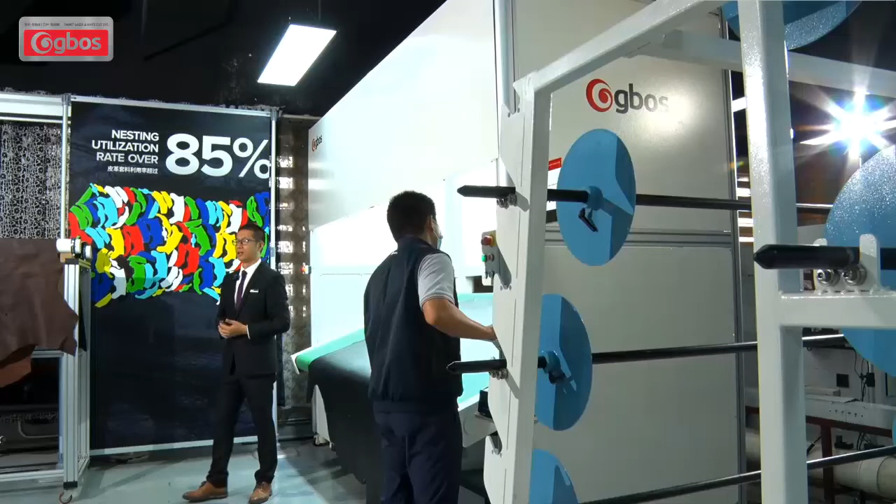Today, our topic is about digital cutting for leather. Less consumption is very important. As we know, leather material is very expensive and not easy to get, so we always need higher utilization. The more leather you save, the more money you get. And the greatest thing is you are making a contribution to society.

Now I'm introducing you to the new system: ITS3, the third generation of our nesting system. The utilization could be up to 85%.

Firstly, let me introduce the hardware to you. The working table has a slope of about 20 degrees, so it follows ergonomics. Your worker could work like this, and it will be easy to reach the far end.

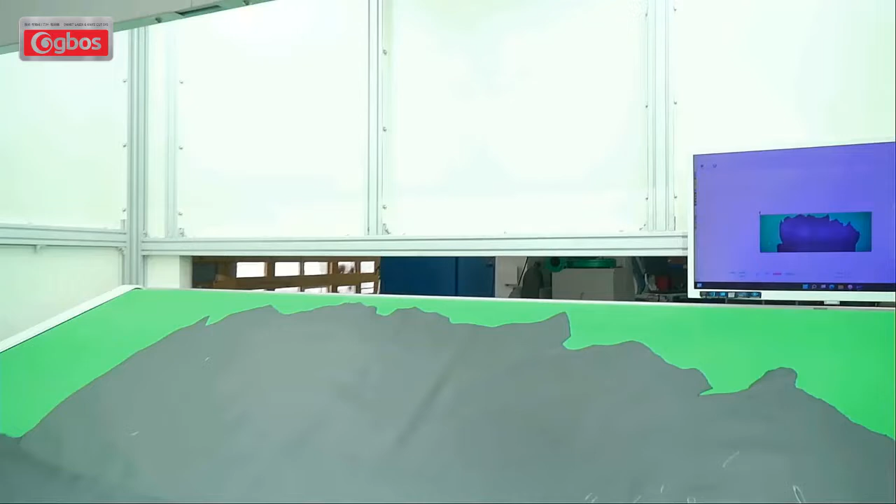Here, equipped with a projector for preview, and also two cameras at the top. The cameras are used to take photos of the leather. What we are showing, the leather size is about 2.6 meters by 3 meters.

Now we show the software part. It's splicing, and the camera will take a photo of each part of the leather and then generate a complete image.

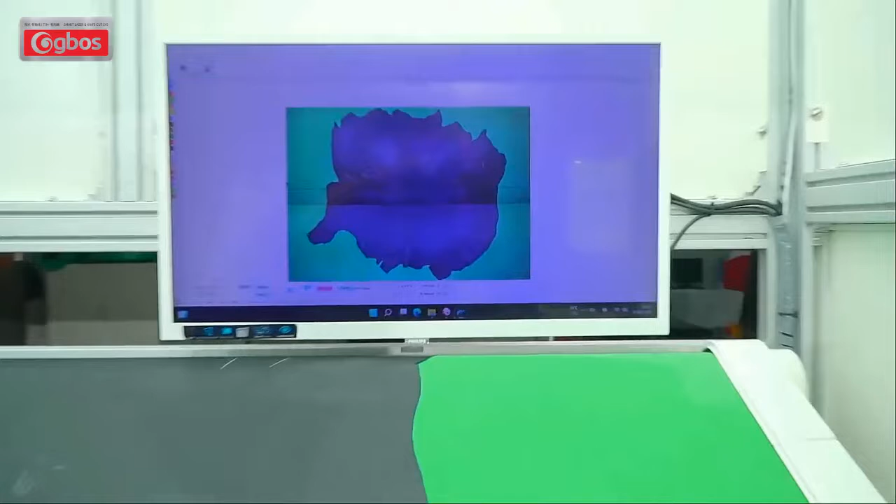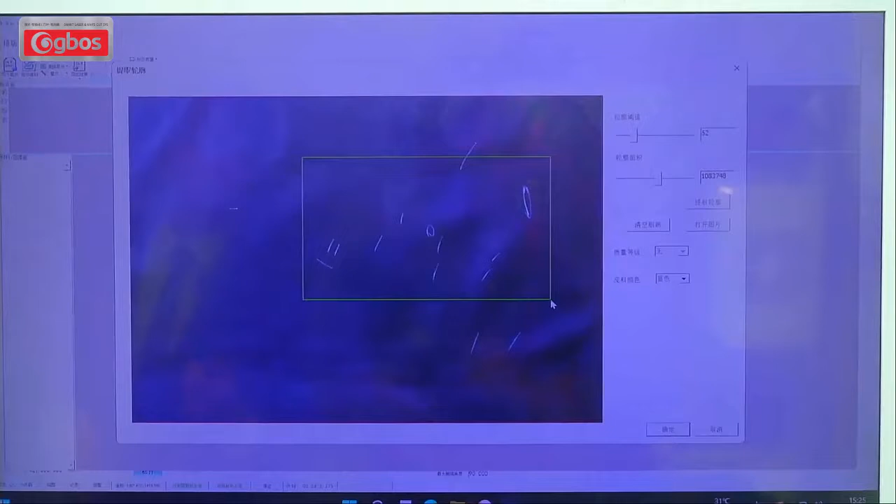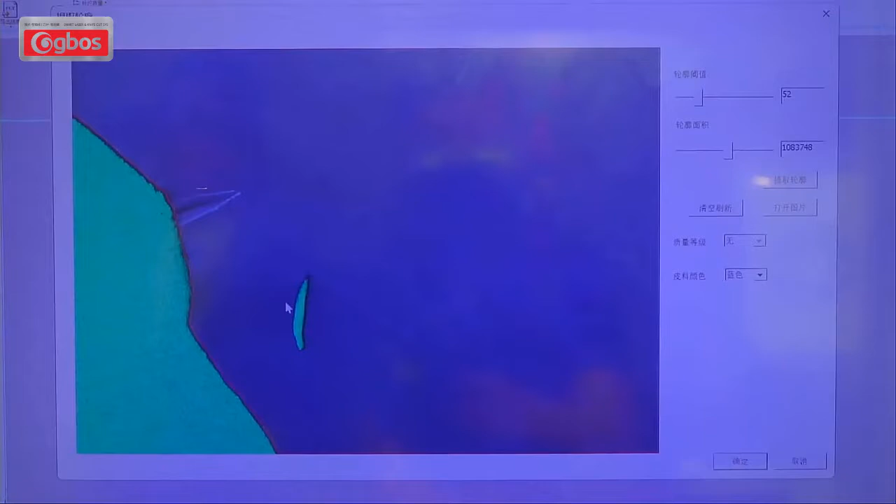Now we can import the components, and here we already marked some defects. Then we just mark it on the system. It's very easy and quick. All things are done automatically.

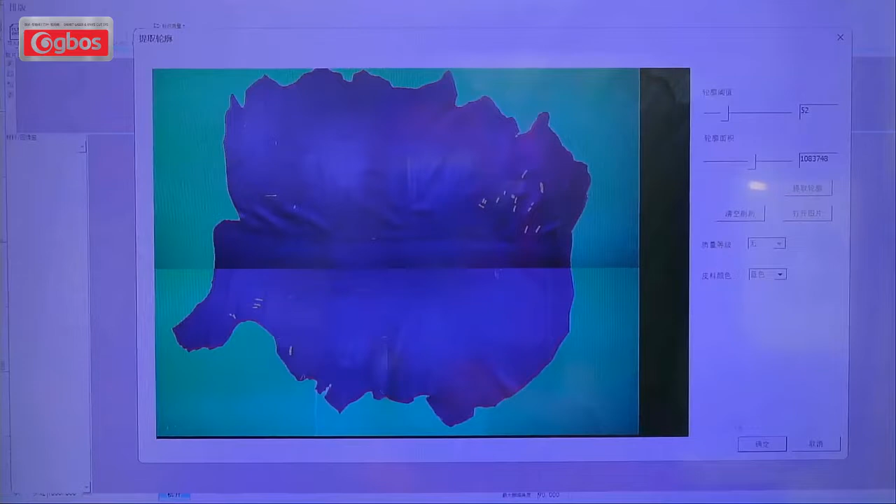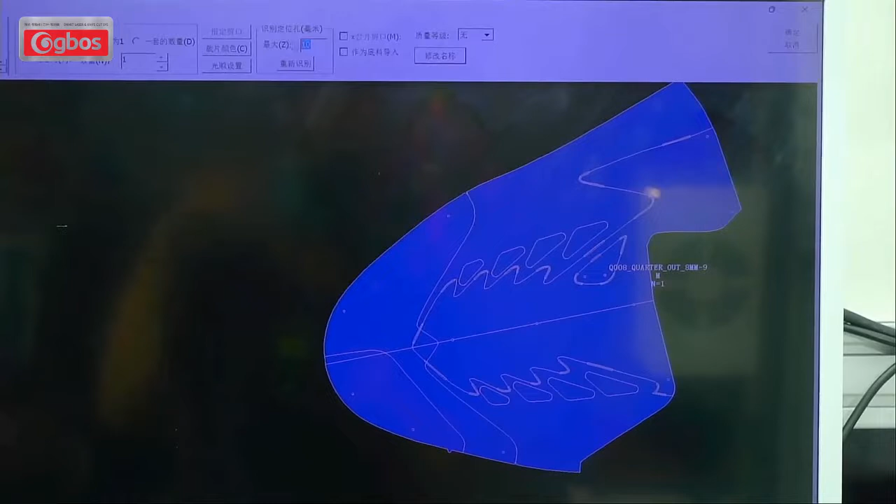Now we import the components file. This file includes more than 20 kinds of different sizes and shapes of components, and we will make a challenge today for their utilization. Those components have different colors, generated automatically by this system.

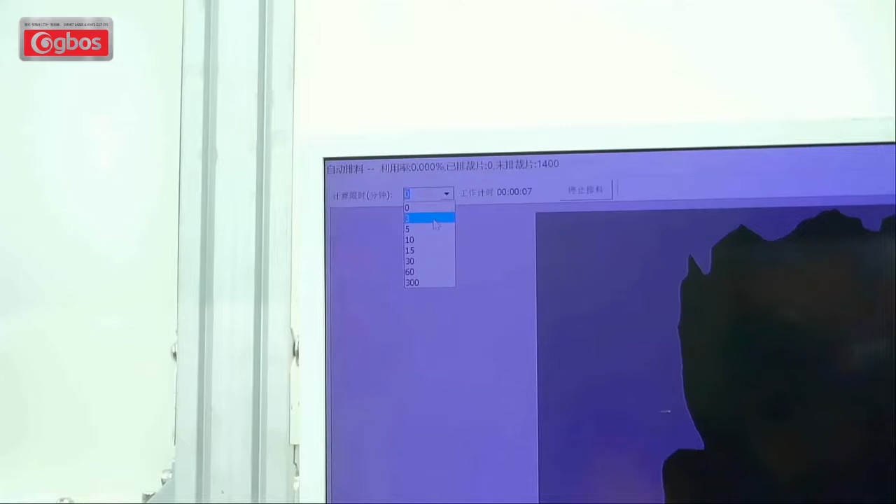Now we choose the time for nesting. Normally 3 minutes to 10 minutes is better.

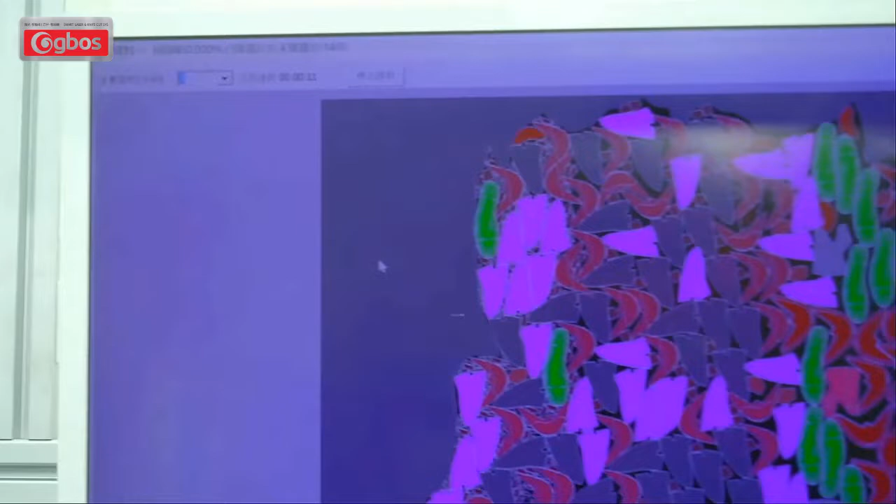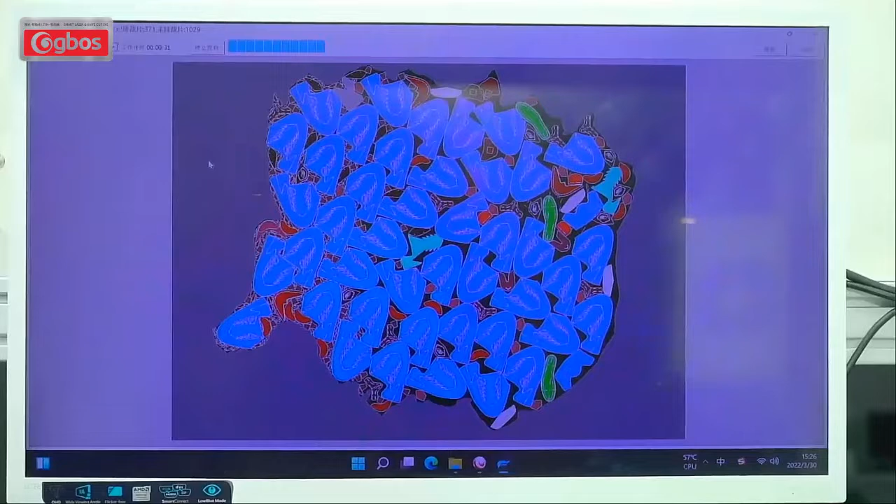What we are showing is mixed nesting, and we can see the different colors of the components. You can also choose a different color for each component by yourself.

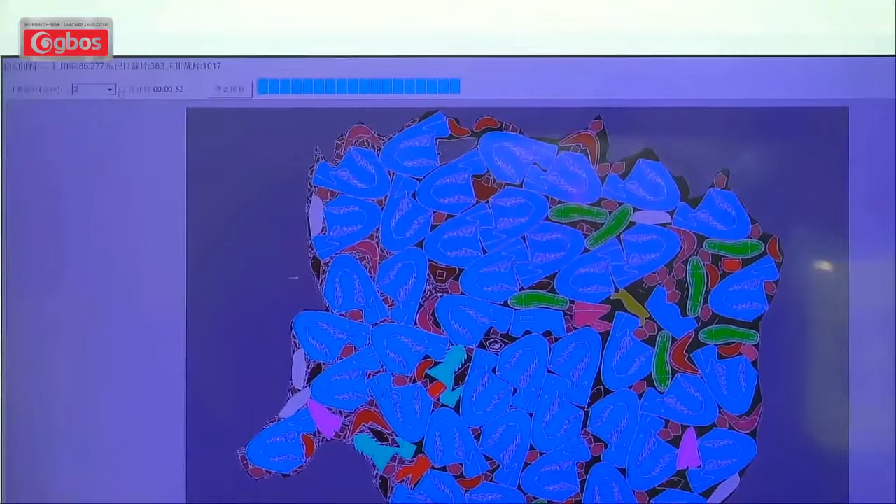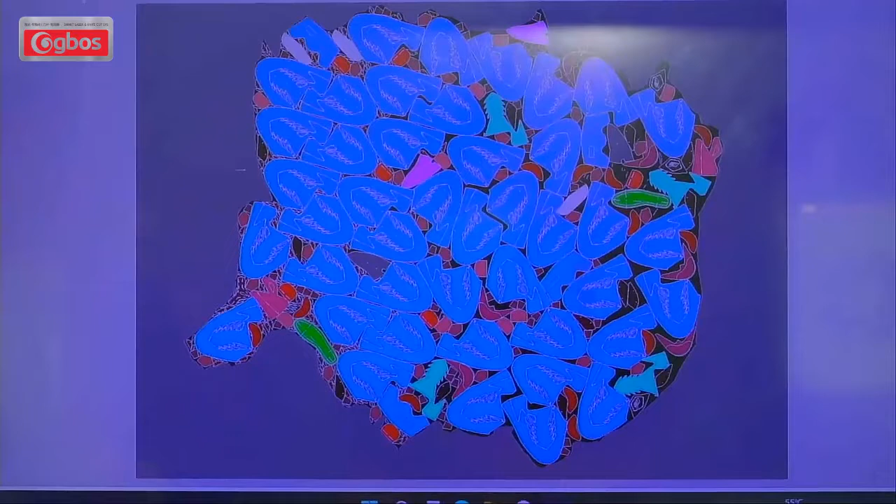In the traditional way for laser cutting, people will recognize each component and the level of the laser, and put the components to each level. That takes a lot of time, and the efficiency is very slow. That means your cost will be high.

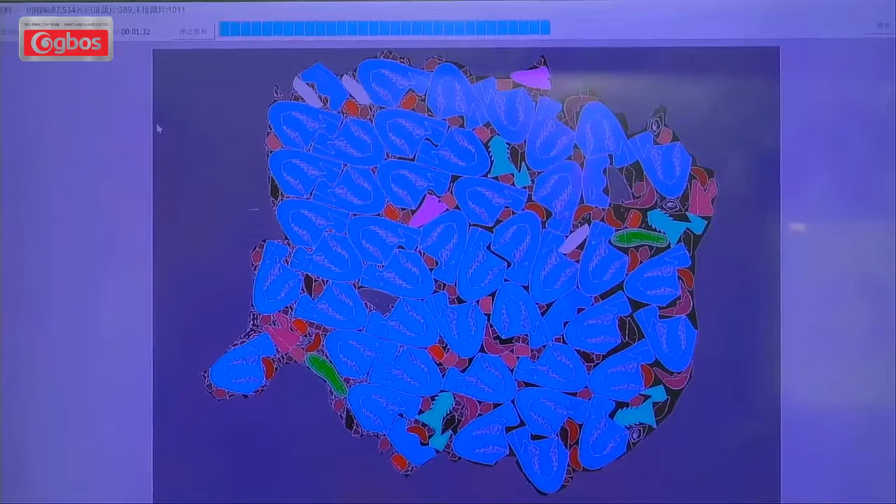So why not use intelligent technology to help you save this part of the cost? If we make the laser in different levels and specify different colors for the components, it will be very easy to put the components to each level of the laser.

This system can make 16 areas of different levels. As we know, in the market, other nesting systems just make about 6 or 7 areas for zonal nesting, but we can make 16 areas.

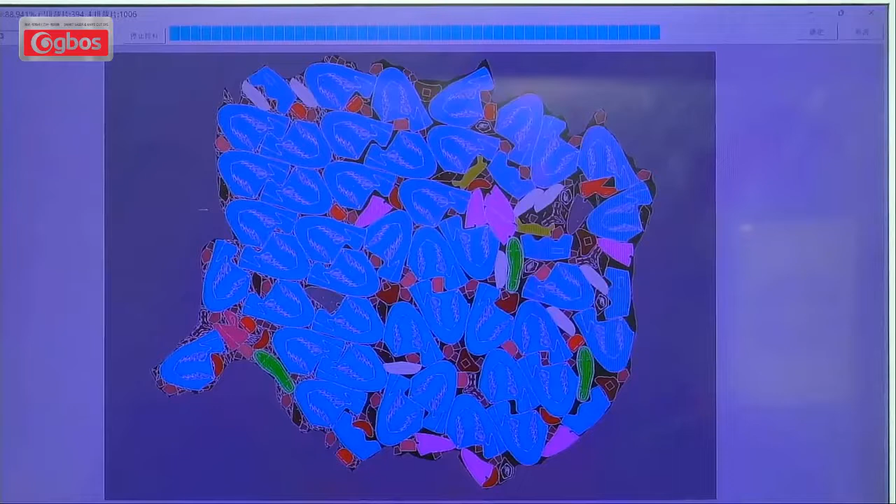So with automatic nesting, and also the next step of automatic cutting, it will save most of the time. That means you save your cost.

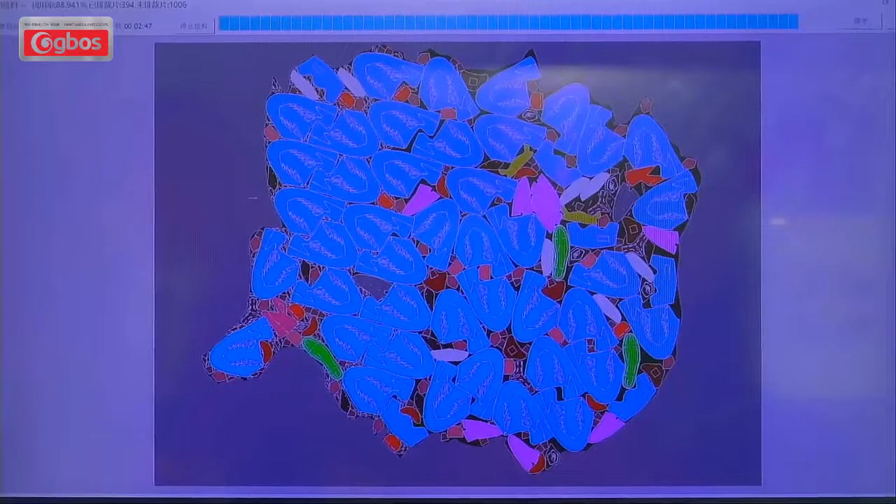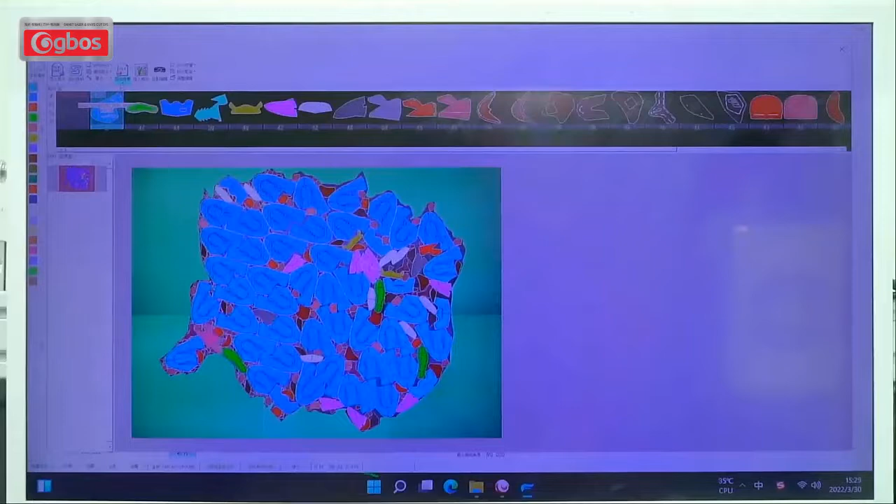We can see the utilization now is close to 90%. This is a very good result for nesting.

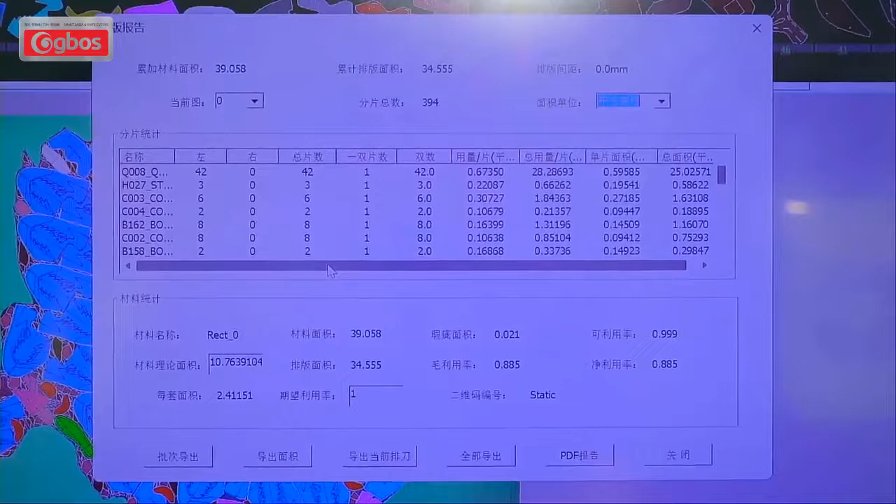And now we can output the report. From this report, you can see each component's area, the material area, and also the utilization. Here it shows 88%. We can also output the report as an Excel file.

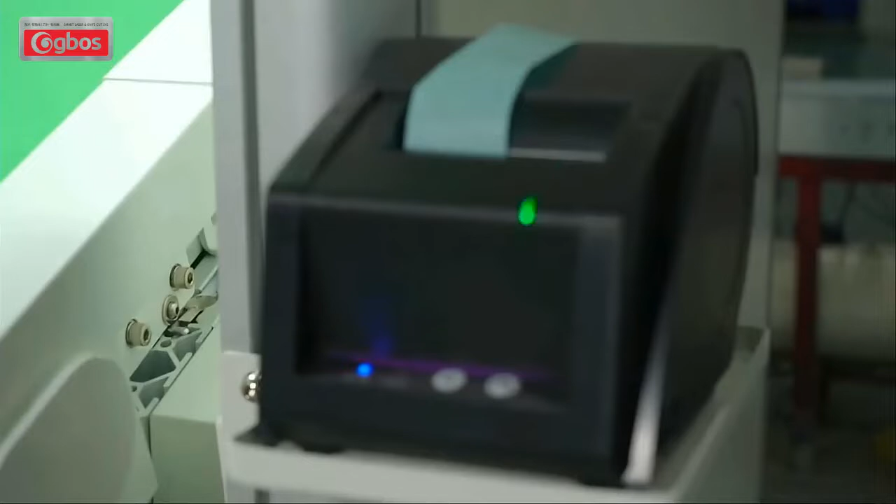After the nesting, we can make the QR code. We just name the QR code - it's like the identification of this leather. Then we can use the machine to print it. It includes all of the information of the nested leather, and we just stick it on the back of the leather. That's done, so now the nesting process is completed.

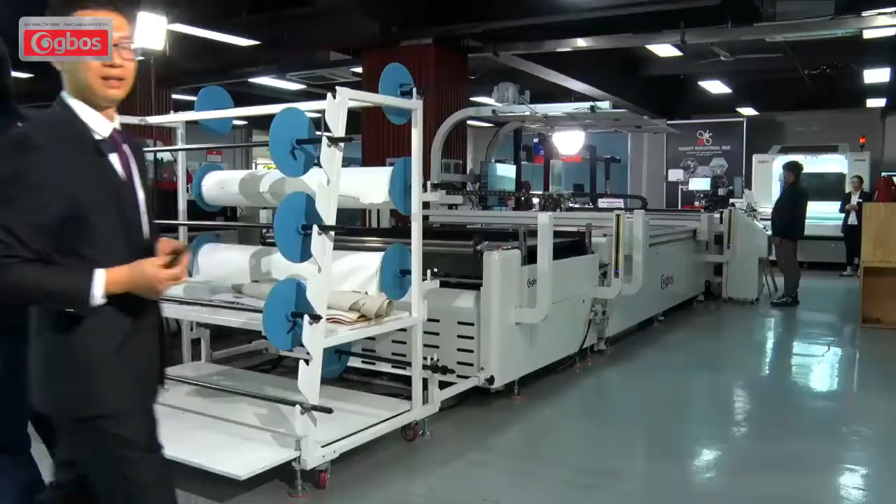This leather is ready to cut. After the nesting, how do we cut it?

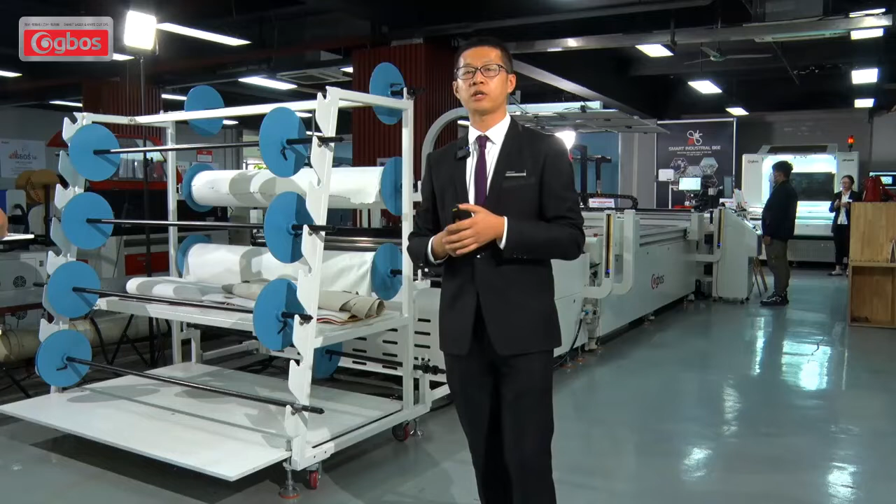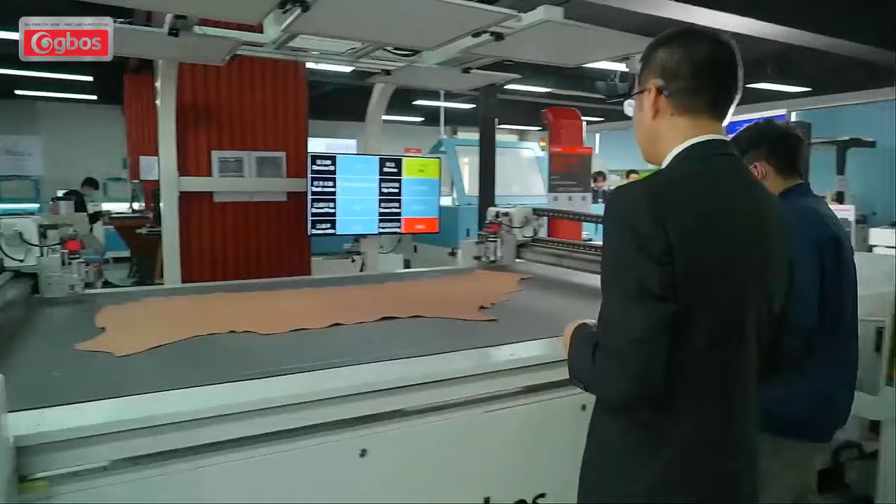Our system is really connected together. We just use the scan gun to scan the QR code, and it will transfer the nesting file to the computer. Let's check - we scan it and it's immediately loaded. We have another nested piece.

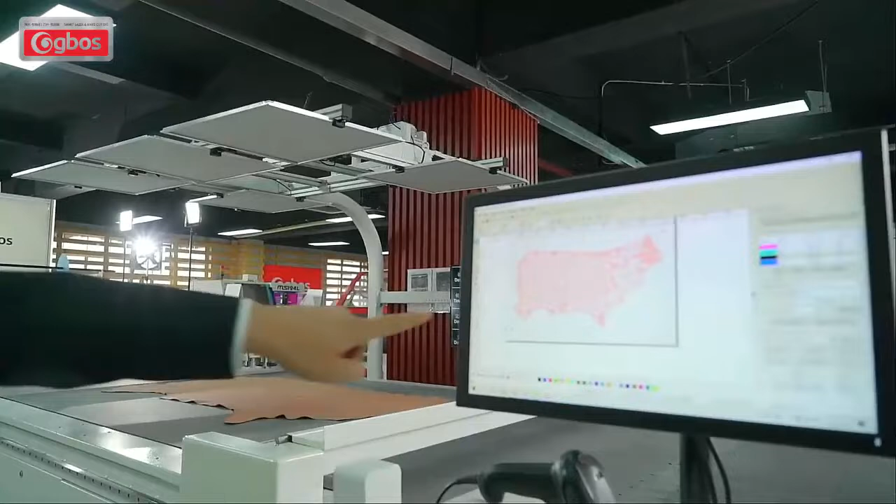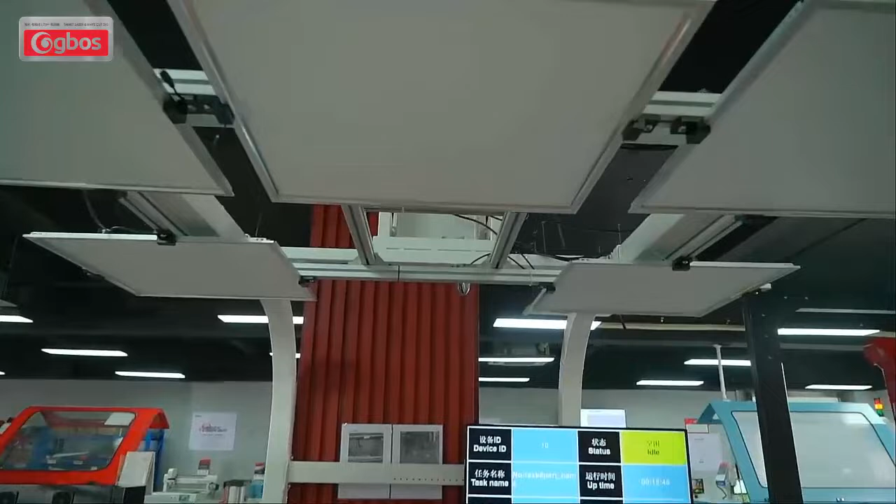We have another nested laser here, and we just scan the QR code. The file will be transferred to the computer, and then we use the CCD camera to make the positioning. It's automatic - the pattern files are put on the leather automatically.

That is automatic - you don't need to put the leather under the pattern. Normally, we would use the projector to make the positioning before, but that takes a lot of time. You need to move the leather often to match the pattern. Now we just use the CCD camera to make automatic positioning. It's very easy.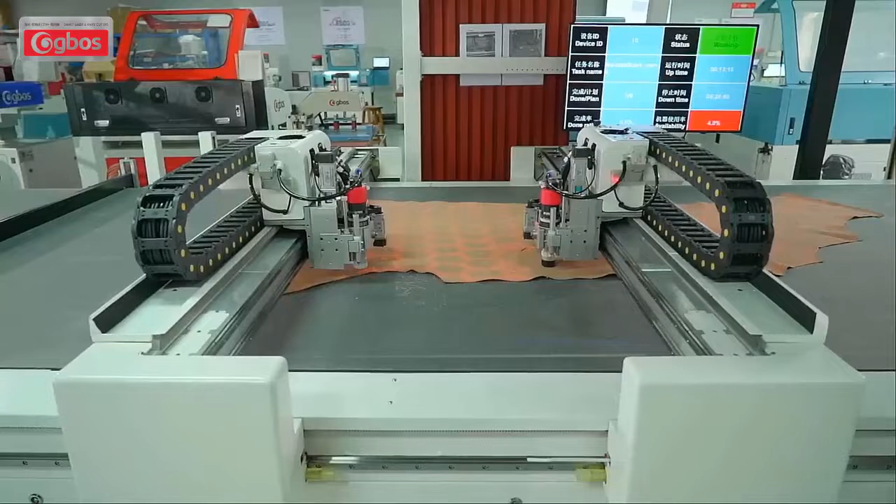We can see the knife head is a mute head. The mute head means the noise is lower than 80 dB. It's open style, so noise is very important in your workshop - it's about environment protection, so your worker will not be disturbed by the noise.

Besides, we have two punchings. You can put different sizes of punching on this head.

The transport system uses a Japanese Panasonic servo motor, and the pneumatic system is SMC. Now we check the rail.

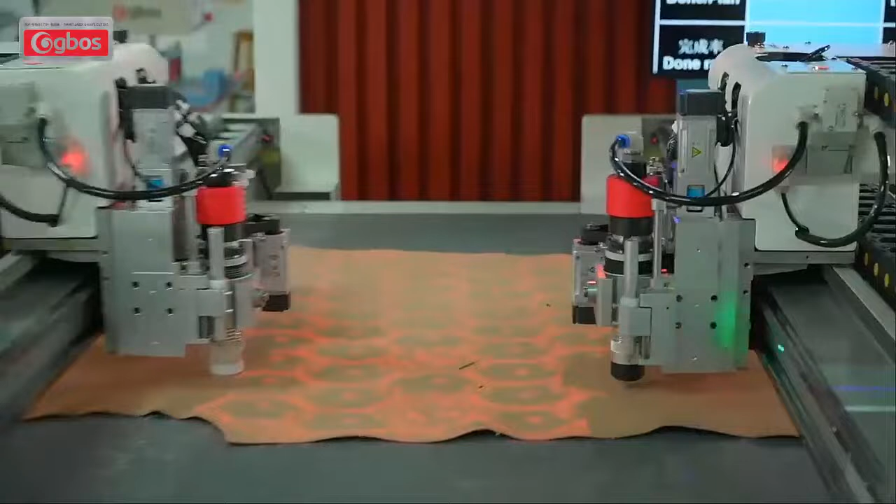This bridge is casting construction. The design lifetime is 20 years - 20 years lifetime, you don't need to make a repeat investment. Don't need.

And here is the gear rack and the linear rail. The precision is 0.01 millimeter.

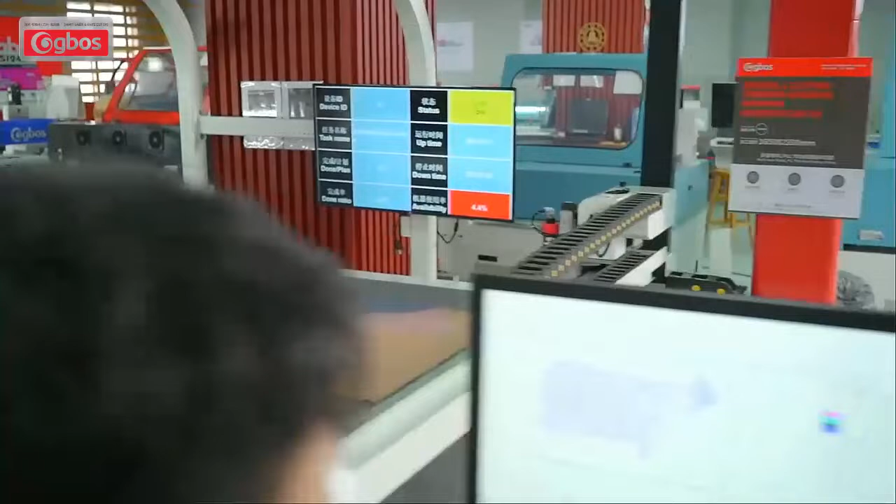Okay, now after cutting, it will feed into the picking area, and then we can make the collection. Thank you so much.

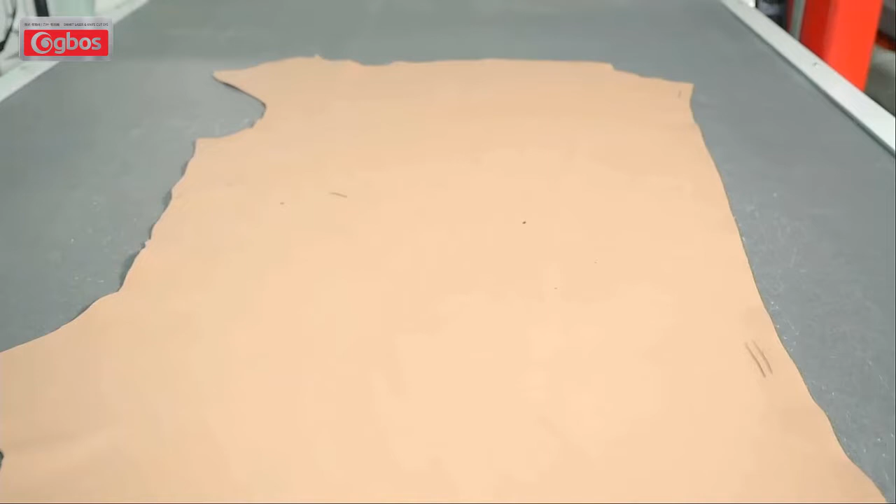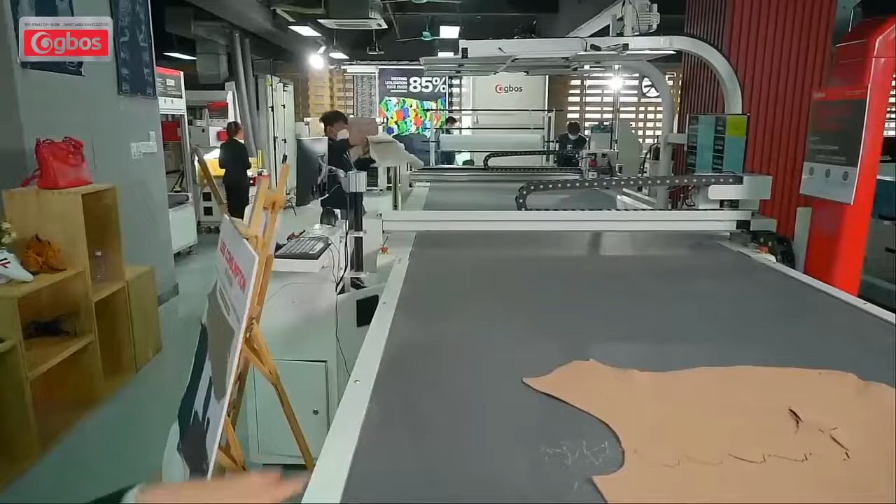Here we have enough space for collecting the components. That's an easy job. And at the same time, when we're collecting the components here, we can load in another leather.

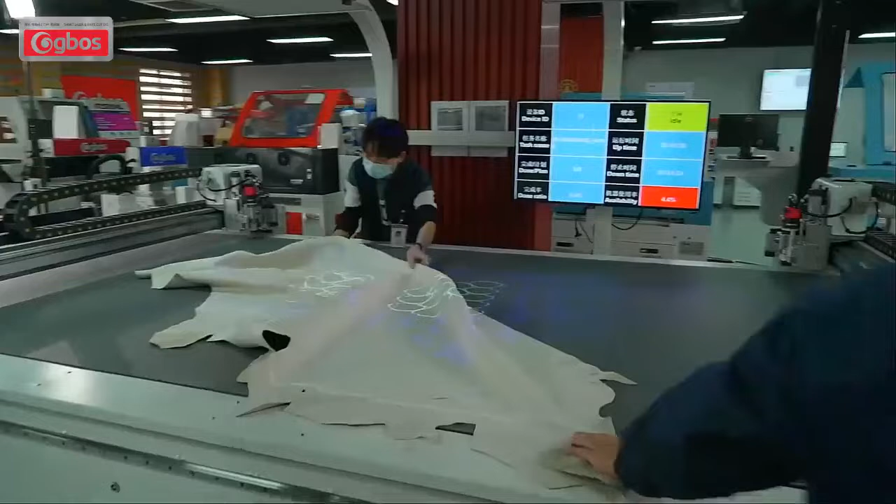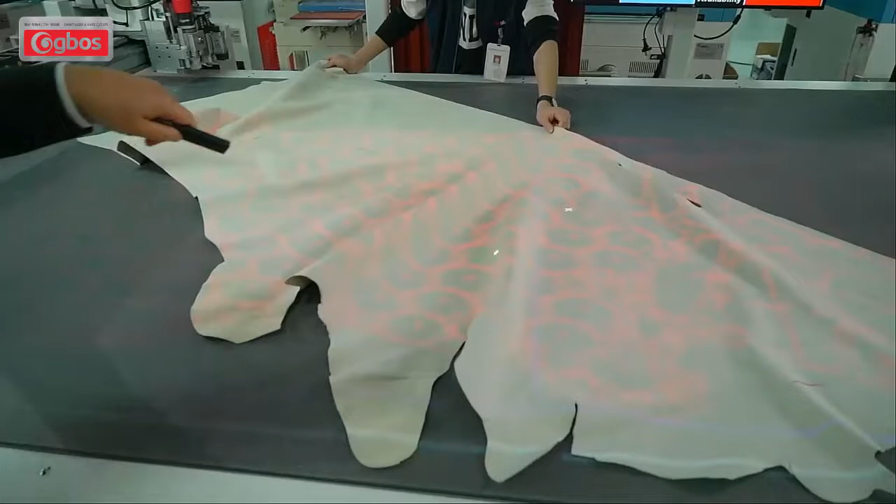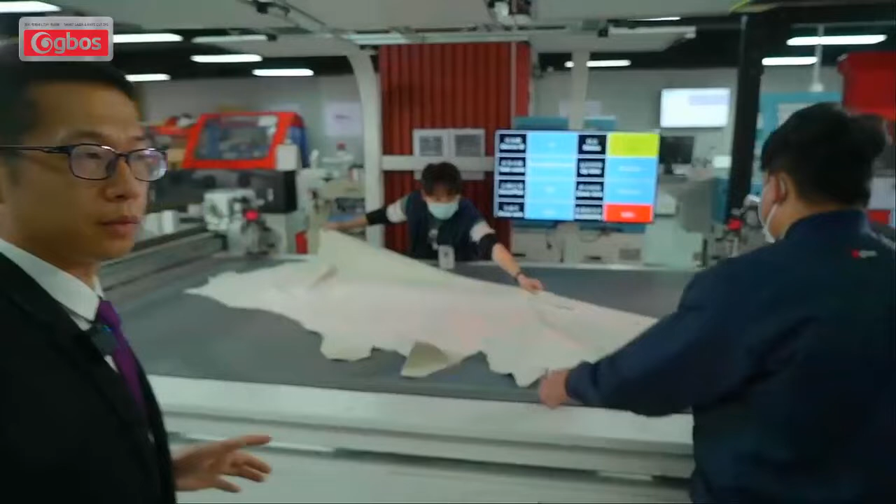Under the projection, here we'll show the size of the components. Now this size is size 8. We just show the workflow, and then also use the CCD camera to make the positioning to do the next cutting.

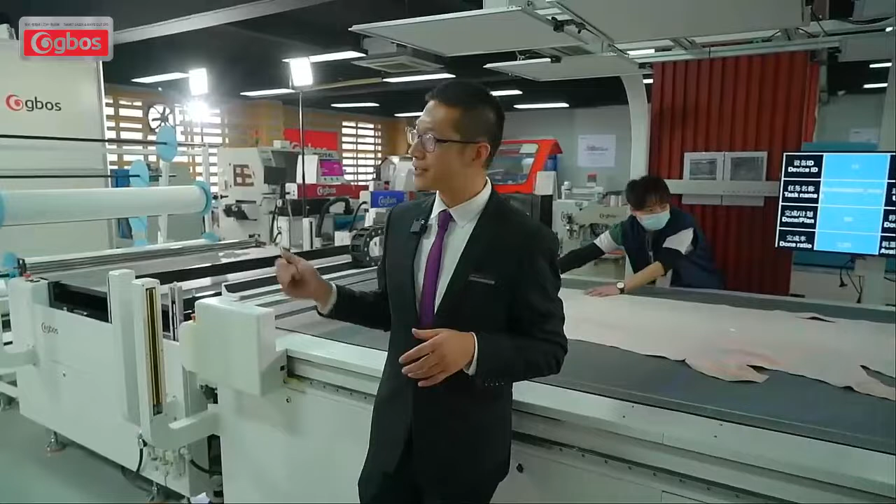This is all about the workflow for the leather nesting and cutting. And about this machine, I want to introduce you. From this view, we can see the overview of this machine. It is just like an aircraft carrier, right?

And the main part is a cutting area, just like a platform. That means you can only have this cutting area for your job. Our conception is 1 plus n. The 1 is the platform. N means different modules, different composition, different combination. You can have the cutting area plus the picking area for your job, and also you can have the feeding area plus cutting area plus picking area for your job.

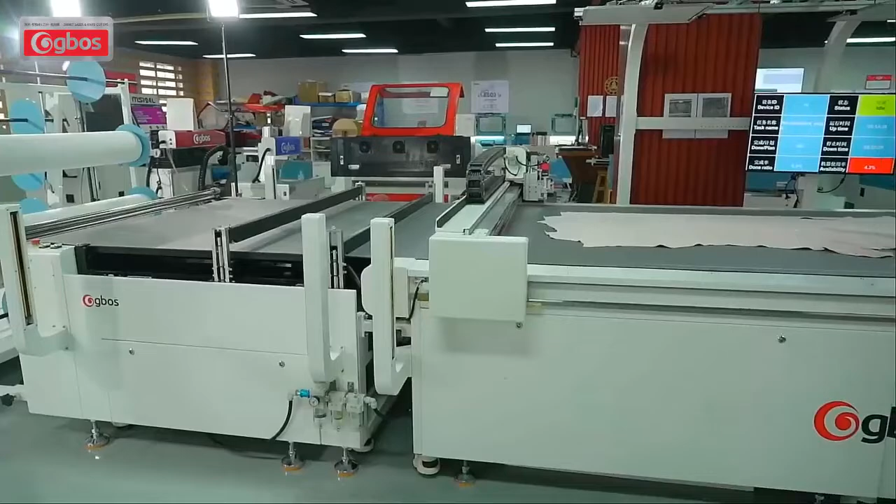Here is a material holder. The material holder can have 6 to 8 raw materials, and with the clamping system here, this 2-bar clamping system, it will feed the materials with the conveyor together without any pulling. As we know, pulling will make the materials deformed, and that will affect the cutting result. So in this way, there will be a very good result of the cutting.

Also, the safety system, the safety sensor, is necessary. We have the safety sensor at the feeding area and at the cutting area, and also an emergency switch. Here is an emergency switch. We have 6 emergency switches in the middle and also in the picking area. Under the table, it is completely enclosed to block the noise from inside.

And under the cutting area, there is a very strong vacuum exhausting system. It has 12 areas, so it can enhance the exhausting power in each smaller area. If we cut this area, the power is just focused on this small area.

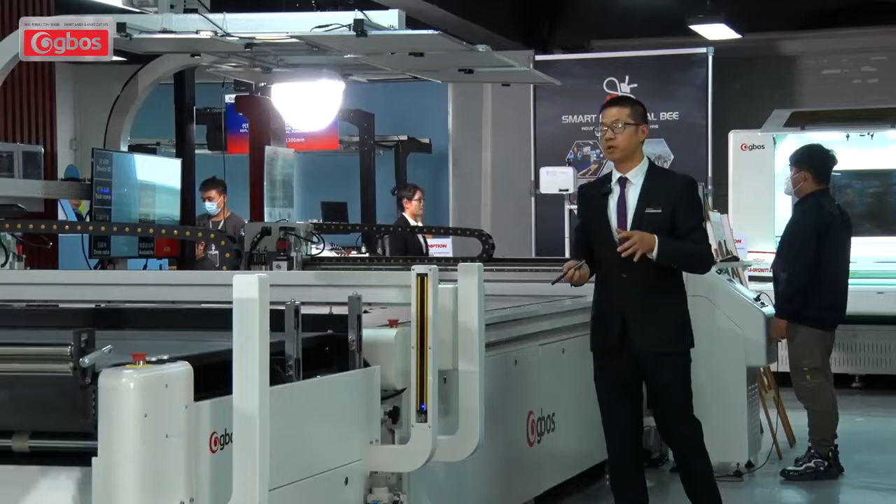This is about the hardware, the options, flexible combination of this machine. And about the software part, it's also 1 plus n, according to different applications you have.

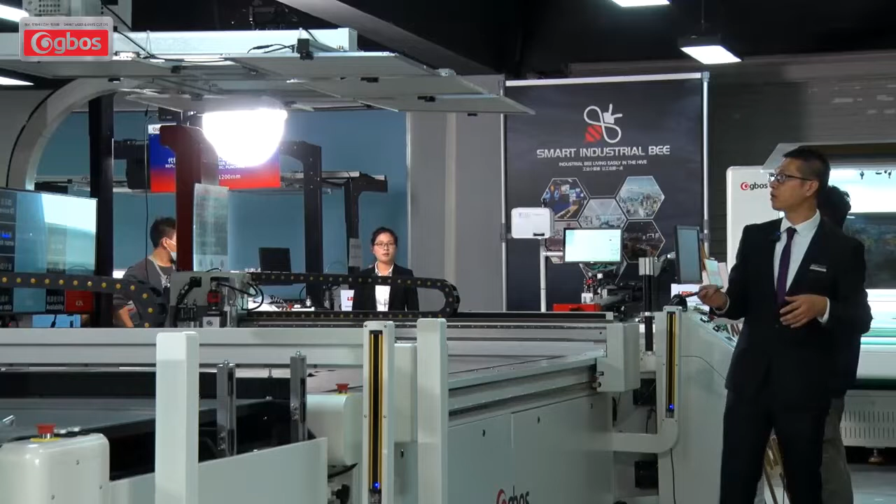We can check the upside. Here are the projectors. This is a general function, just for previewing, like this. And also the LED panel, it works with the camera. Here is a camera on the top.

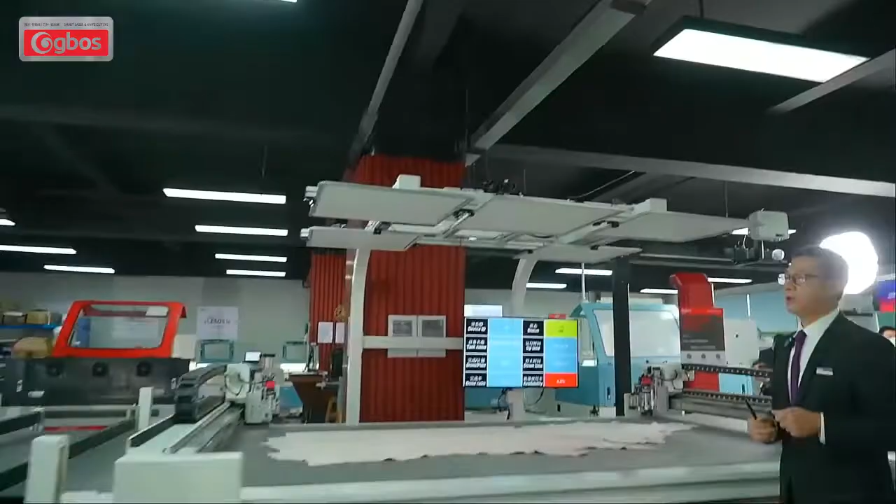This camera can have 2 functions. One of the functions is the SCCD for the positioning, because some materials have some patterns printed on them, and we need to do the positioning.

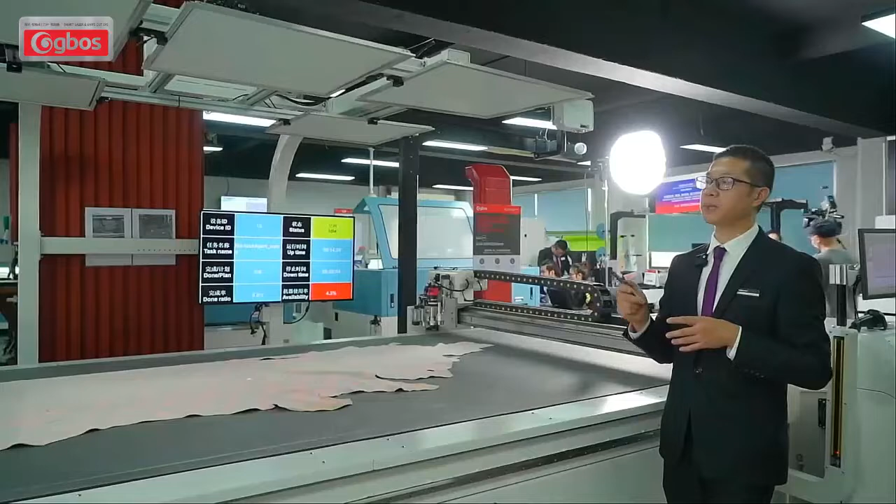Another function it can have is the ITS2. We just introduced the ITS3, that's the 3rd generation, and the ITS2 is the 2nd generation. It could be installed with the machine together. So sometimes you can just put the leather on this platform and use the ITS2 software to make the nesting and then cutting directly.

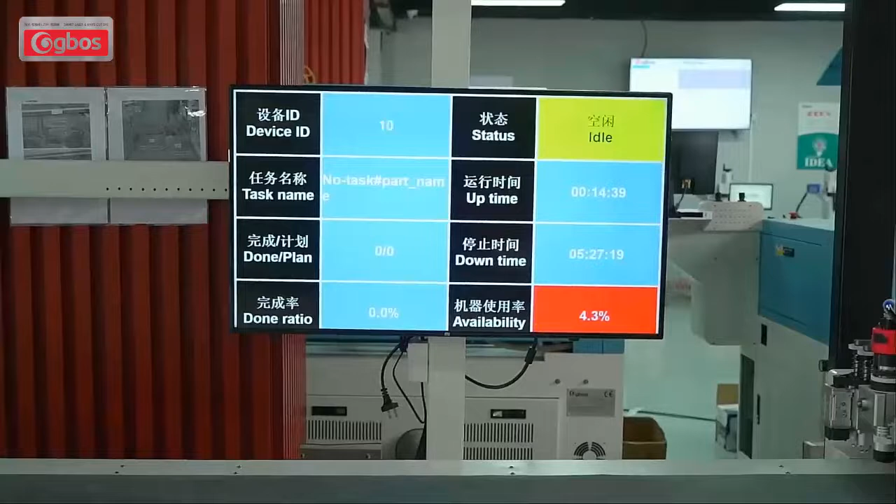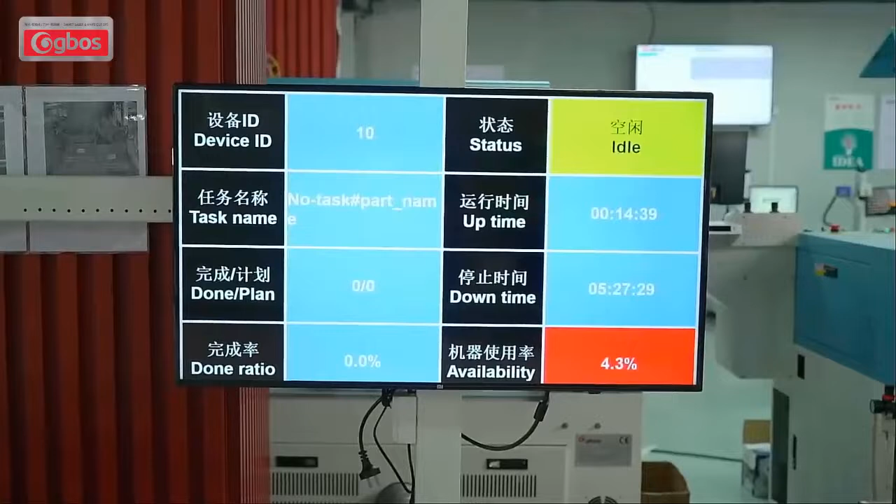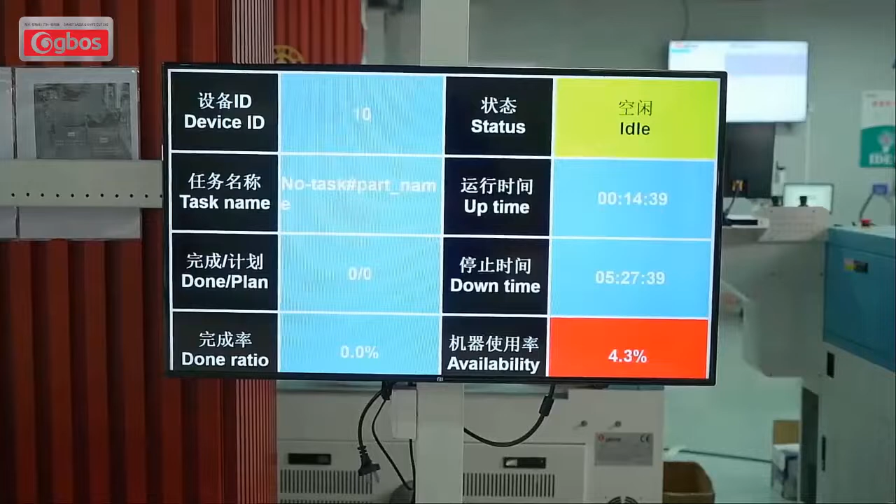This is about the different combinations of the platform according to different applications. And then we can see this screen, it's an OEE Kanban. It will show some data of the machine and the materials — the device ID, the status, the uptime and downtime, the availability, and so on.

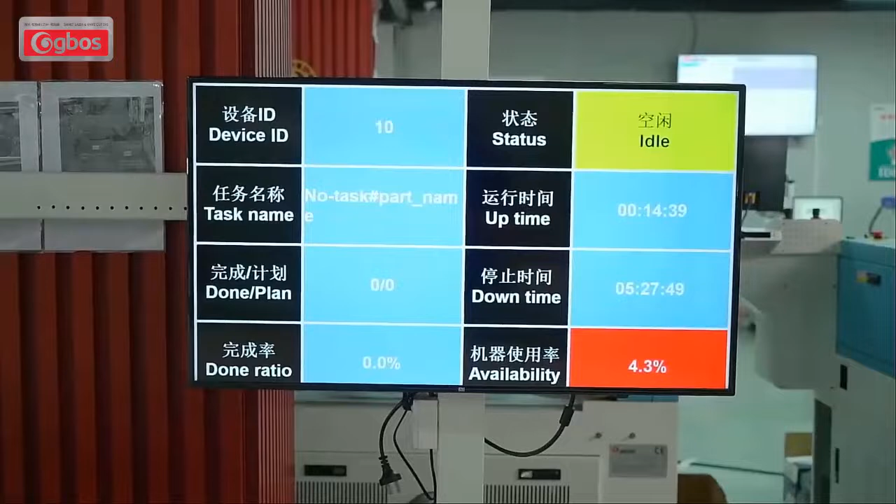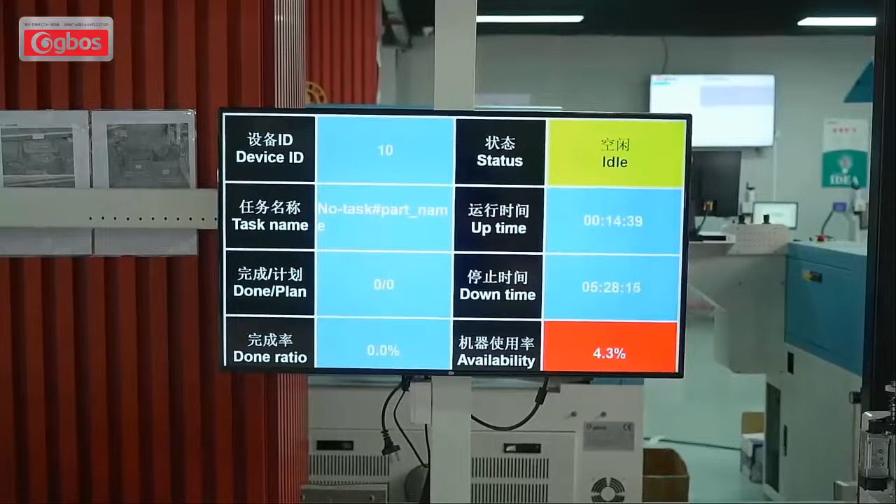There are 3 places you can check the data. One is here with the machine, and another one could be in your workshop, where you can check all of the data of your machines. Another place is in your ERP system.

With the IoT bridge, Cgbos IoT bridge, it can collect all of the machine data together to transfer the data into your ERP. Just like...

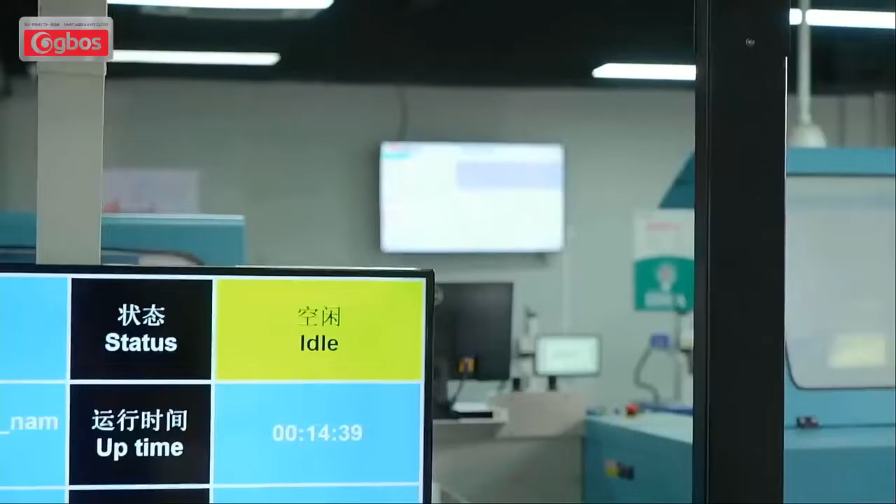In this showroom, all of our machines are connected with the IoT bridge, and here it will show each machine's data and numbers, how many components we cut, and also there's a TPM section.

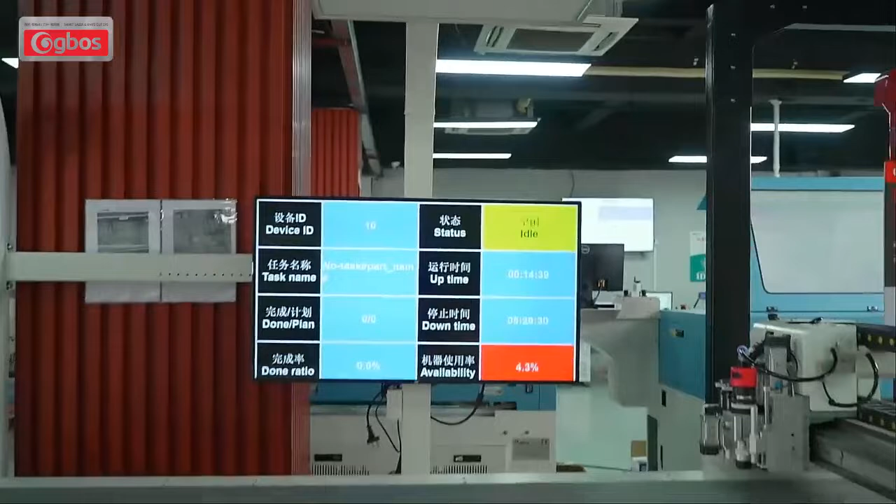It will remind you about the maintenance of some parts, like the knife head. It will tell you maybe 3 days later you will need to change it. It is an intelligent system for the factories.

So this is all about the nesting and cutting for leather, and of course this cutter can be used for other materials like PU, TPU, and mesh, with the material holder to send multiple plates to cut. And we suggest 1 nesting system plus 2 sets of knife cutters. This is the best combination for mass production for leather.